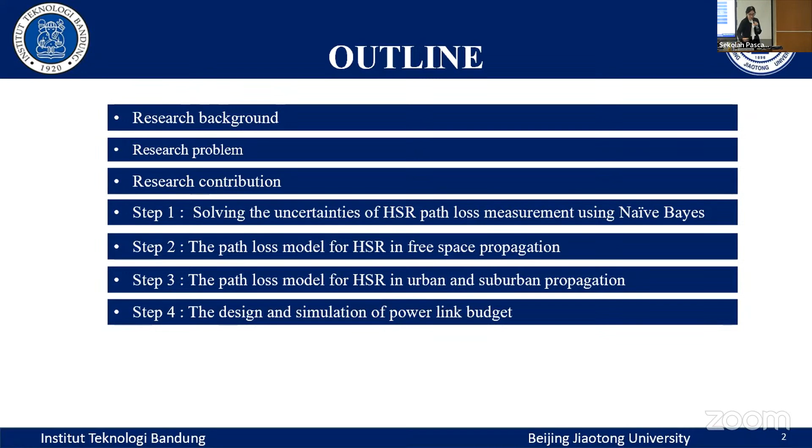And then I'm going to solve the uncertainties of high-speed rail path loss measurement using naive Bayes. And then we proceed to proposing a path loss model to be utilized in free space propagation, followed by another path loss model to be utilized in urban and suburban propagation. And then I'm going to show you the design and simulation of power link budget in which the proposed path loss models are calculated into it. And then after this, we have conclusions and remarks drawn at the end of this presentation.

Let's see here. This is how Indonesia must face the severe public transportation problem. It may include the problem of saturation, which happens when the number of cars is more than the roadway can support. And then we have the problem of construction, which may include installing traffic lights, creating one-way streets, and adding more lanes to the highway. And also we must face the problem of accidents, because car accidents block traffic flow for many reasons. This problem is also growing leaps and bounds in developing countries like Indonesia.

Therefore, high-speed rail provides many benefits as it boosts the economy in many ways. It is safer than driving. It can reduce our dependence on foreign oil and congestion also. It is more time efficient and produces less smoke in the city as well.

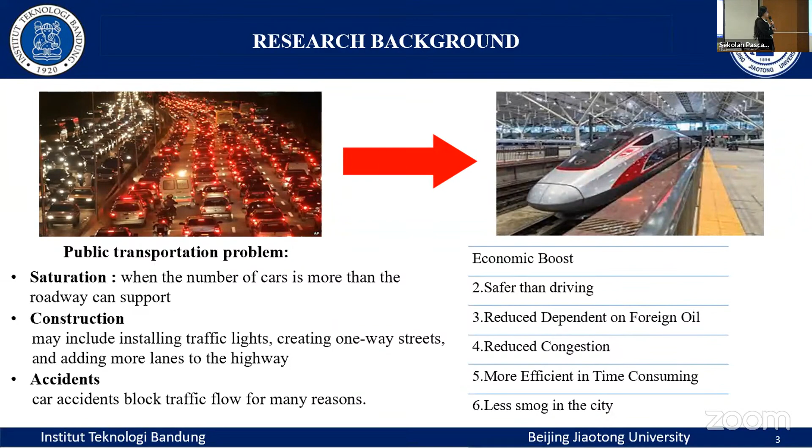From here, I'm going to show you that Indonesia adapts the Future Rail Mobile Communication System, which is a platform for unified voice and data communication for modern railway applications. It is a platform for the previous GSM-R. It is easily integrated into the higher allocated spectrum.

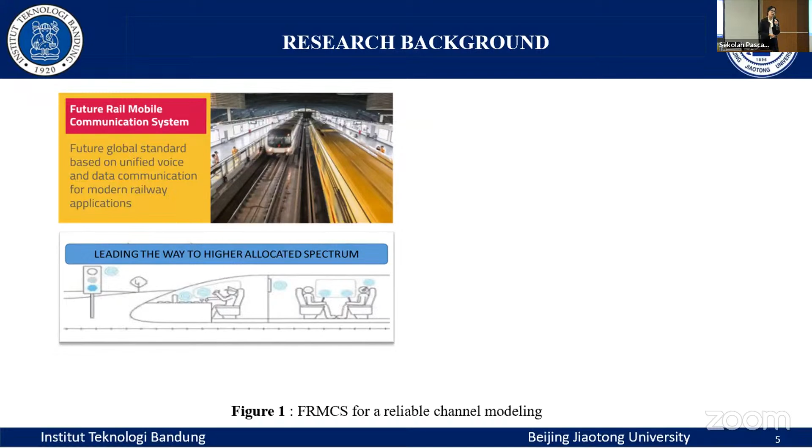And to ensure the reliability of the FRMCS system, we require what we call channel modeling. Channel modeling defines a mathematical equation of how the signal behaves, and it is classified into the outdoor channel model and the indoor channel model.

In the outdoor channel model, the propagating signal must face multipath components. And for high-speed rail, it must face the line-of-sight scenario and non-line-of-sight scenario. Meanwhile, in the indoor channel model, the signal propagates from the mobile relay station to the mobile station, which is located inside the high-speed rail itself.

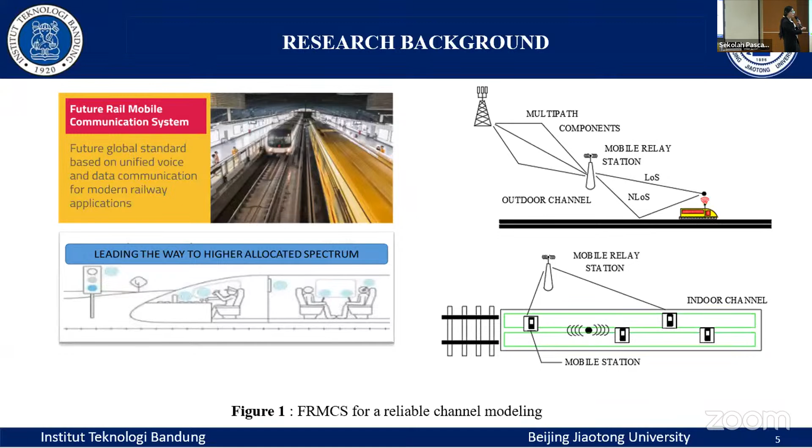So the key objective of adapting this FRMCS system is to mitigate the obsolescence of narrowband bearer technologies in order to keep up with modern telecom infrastructures. This requires more bandwidth to support advanced features such as standardization like 3GPP and onward, to fully support train control, security, and safety.

So from here, I can summarize my research problem like this. Indonesia adapts the future railway communication system, in which we require reliable channel modeling. Therefore, the study of path loss becomes very prominent. And there are two supporting technologies for reliable transmission, the MIMO antenna systems and small cells, in order to achieve the optimal power link budget to be utilized by network designers.

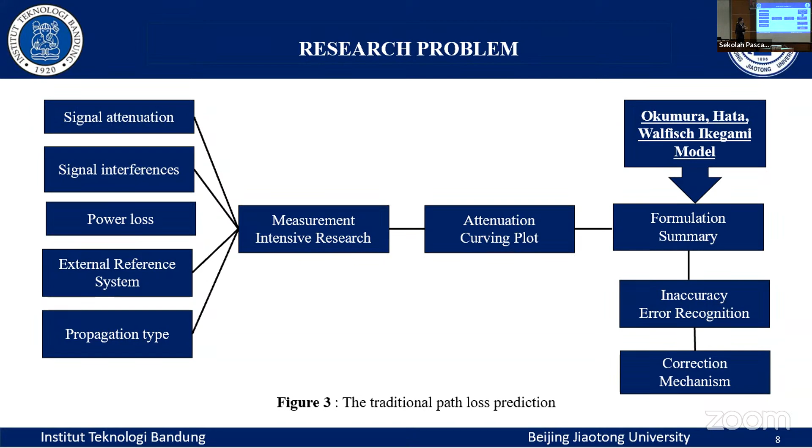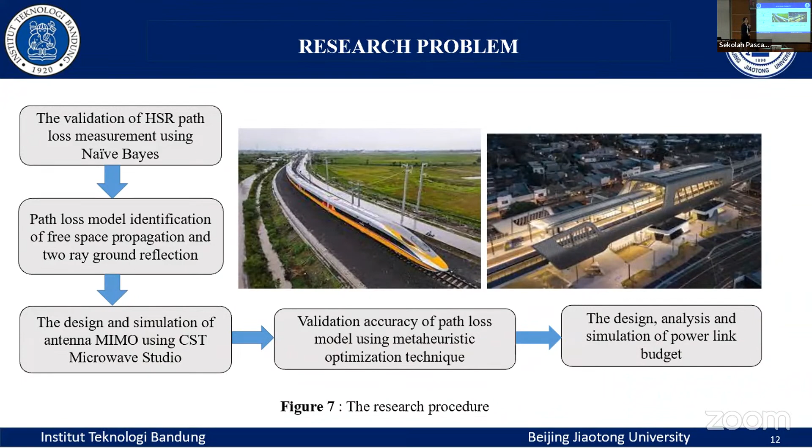Okay, now I'm going to start this off with step number 1. In this part, there are 3 factors that must be under investigation. Firstly, we have the factors of path loss, the measurement, and artificial intelligence. And naive Bayes is put in the middle because this is the machine learning method that I'm using. And this is the common formulation of naive Bayes.

The achievement would be the prediction of a binary result, in this term, accurate measurement or inaccurate measurement. And this is where all the data preprocessing is located, under the assumption of independence from each other. So from the raw data set that was given by Beijing Jiaotong University, I apply the data preprocessing to be put in probability B, and I apply the Gaussian naive Bayes classifier. I can then have a performance indicator in the form of a confusion matrix and the prediction of the binary result.

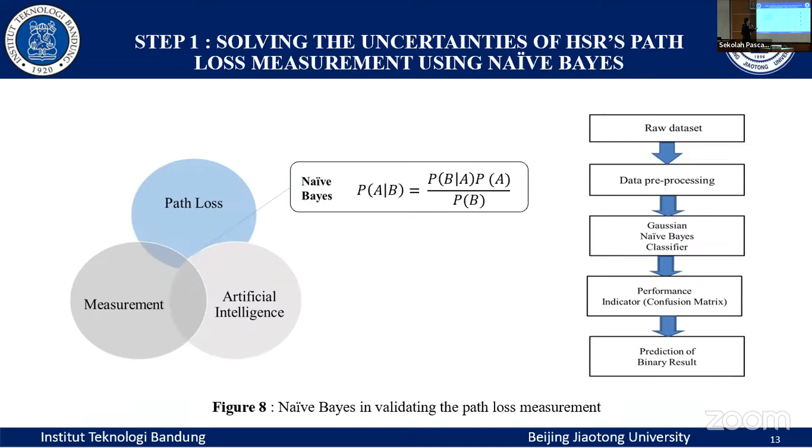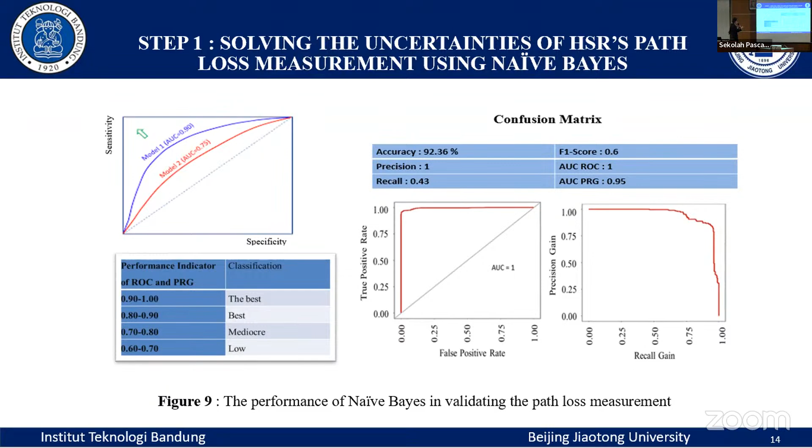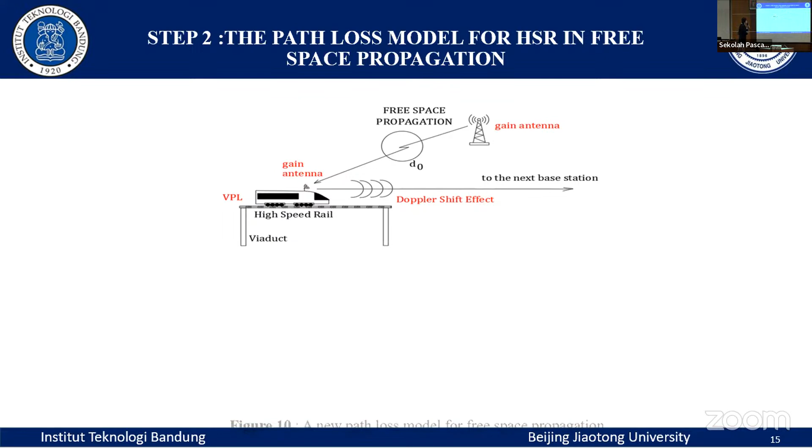From here, I'm going to propose my path loss model to be utilized in high-speed trains under free space propagation in the viaduct scenario. This scenario is chosen because this is where the signal is free from attenuation and obstruction. And in my path loss models, you can see this is the model that I propose. This is where the validated measurement data set is located, which is equal to 92.45 plus 20 log frequency carrier plus path loss D0 plus 10 gamma log d divided by D0 plus X sigma plus Doppler frequency plus vehicle penetration loss minus 14.89.

As you can see, there are 3 unknown parameters here. I notified them in red, and I'm going to change the terminologies into X1, X2, and X3 when the iteration begins. These are the unknown parameters that we must find using a meta-heuristic optimization technique. But let's firstly define one by one the meaning of each parameter.

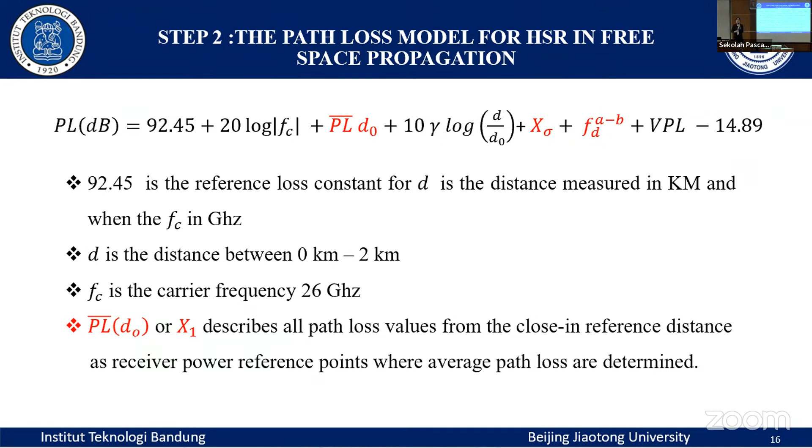Firstly, we have 92.45. This is the reference loss constant when distance is measured in kilometers and the frequency carrier in gigahertz. The distance is the observation range, 0 kilometers to 2 kilometers. The frequency carrier would be high, at 26 gigahertz. The path loss D0 describes all path loss values from the close-in reference distance as receiver power reference points where average path loss is determined. You can say this in a simple term: this is where the signals begin to attenuate.

And then after this, we have gamma, which is the path loss exponent, put initially to 2, and X sigma, which is the loss due to fading and shadowing. And then we have the Doppler frequency, which is a non-linear equation, and the values are dependent on the corresponding distance. And then we have 20 to 25, which is the maximum vehicle penetration loss, and 14.89, which is the gain of the 2x2 MIMO antenna from the simulation using CST Microwave Studio.

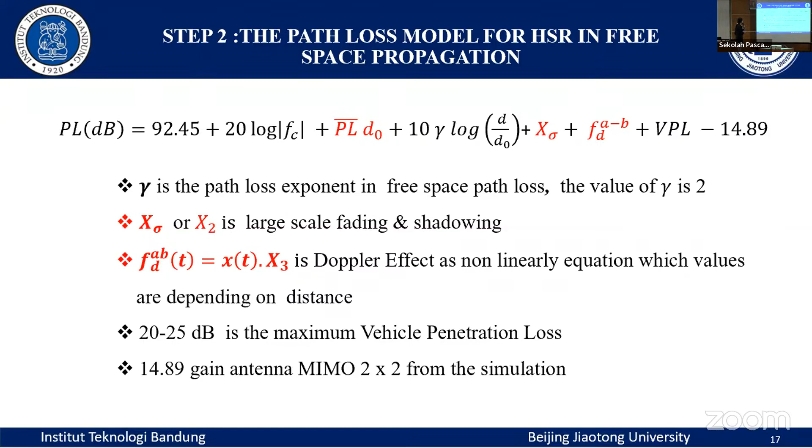Now, firstly, let's talk about the path loss exponent. This is a parameter indicating the rate at which the receive signal level decreases with distance. And this is the typical path loss exponent for many kinds of environment. Let's say free space initially is 2, and we have a value for urban and suburban, indoor line of sight, and obstruction in building, and factory is 2. But for high-speed rail, we will find out later how it can be achieved.

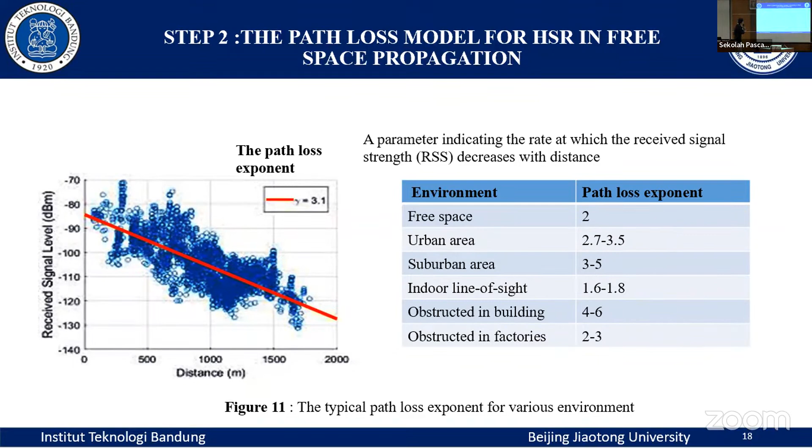Now, let's start to validate the model, but firstly, I'm going to show you the MIMO antenna system that I conduct in this research. Firstly, this is the manual calculation of a defected ground structure antenna, one element. And if I configure the antenna like this, I'm using RT Duroid 5880 because it is easy to be fabricated.

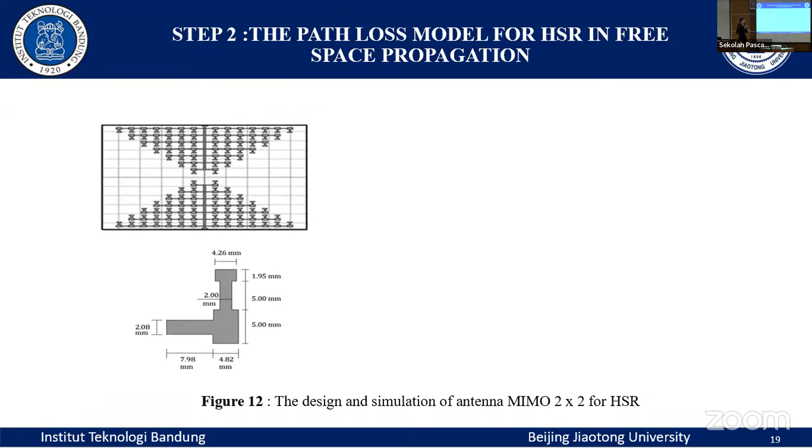And when I feed it with a microstrip feeding line, we can see the movement of the electromagnetic beam, and I have the gain of 14.89 decibel. This value is very meaningful because this gain is sufficient enough to mitigate all the losses from my path loss values, and also it can bridge the low and high frequency spectrum of high-speed rail.

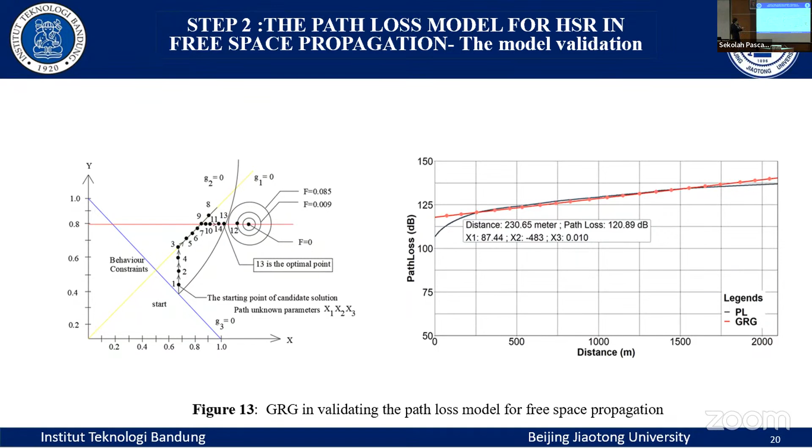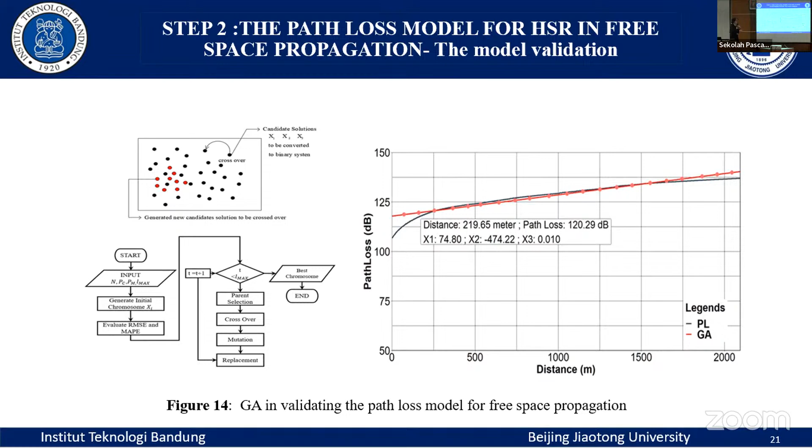From GA, I'm using another metaheuristic, what we call particle swarm optimization. So here we have two kinds of terminologies: the best position and the best velocity. And of course, there are some control parameters like inertia weight, coefficient relation, how many iterations you want to conduct. And you see that PSO has successfully validated the model when the distance is 194, when the path loss is 119, and these are the candidate solutions achieved by PSO.

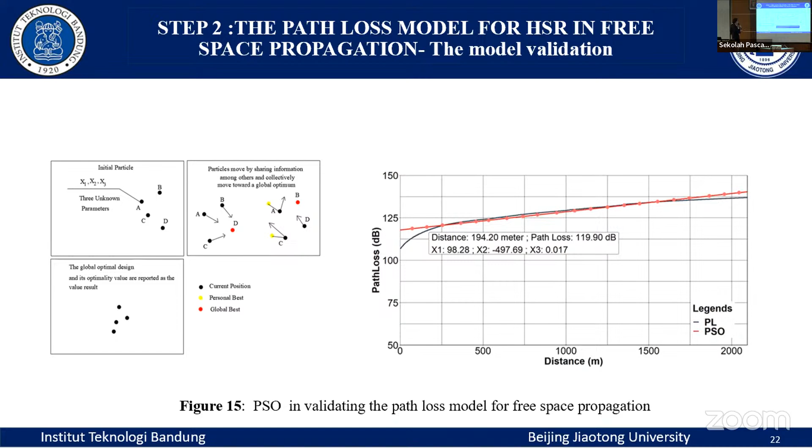From PSO, I am using CAPSO. CAPSO is an improved PSO because it uses only the global best without the individual best solution to reduce randomness. Not to forget to mention that in CAPSO, I'm injecting Newton's law of motion to iterate the process really fast. You can see the performance of CAPSO; it converges when the distance is 224, when the path loss is 120, and these are the candidate solutions achieved by CAPSO.

From CAPSO, I'm using FPA. This is a more up-to-date algorithm. We can see in the flower pollination algorithm, we have two kinds of pollination: abiotic if the pollinator is the wind, biotic if the pollinators are insects. And then we have types of pollination. We have self-pollination with the same flower, self-pollination with a different flower of the same plant, and cross-pollination with a different plant.

And based on these pictures, there are 5 rules of FPA that must be considered. Firstly, biotic pollination and cross-pollination is global pollination, carried by the pollinators. We can call the pollinators' movement a Lévy flight. And abiotic pollination and self-pollination are considered as local pollination. And insects as pollinators are equivalent to flower constancy, with reproduction probability proportional to the similarity of the two flowers. And then local pollination and global pollination are controlled by this switch probability.

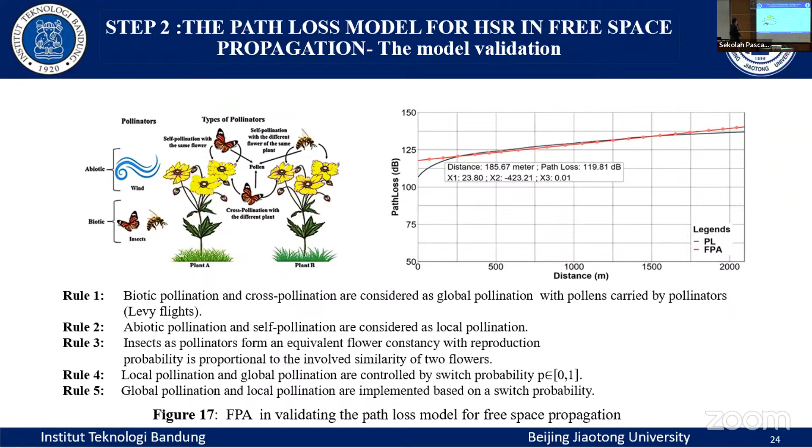This is mimicking the hunting behavior of the humpback whales. There are three terminologies we have to consider. Firstly, what we call the logarithmic spiral; searching for the prey; and the bubble-net attacking, what we call the exploitation phase, while searching for prey is the exploration phase. And this whale optimization can already validate the path loss model when the distance is 229, when the path loss is 120. And these are the candidate solutions achieved by WOA.

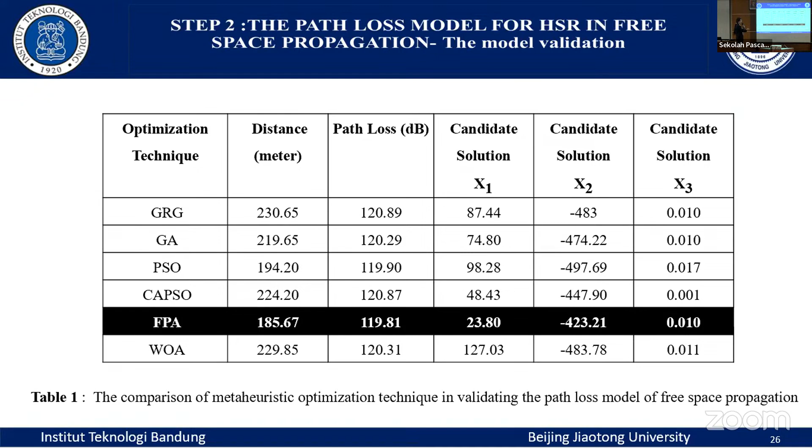From here, I'm going to show the comparison of those meta-heuristic optimizations for free space propagation. From the 6 optimization techniques, it is FPA that is chosen as acceptable to be put back in the equation, because it converges faster than the other optimization techniques. And therefore, let's see the iteration of the path loss exponent.

In high-speed rail, in my research, the path loss exponent is achieved by averaging each batch of iterations. One batch is like 500 times. And we can see I can put gamma as 2 as the average path loss exponent in the equation. And this is the candidate solution achieved by FPA that is acceptable to be put back in the equation. And this one, we have to calculate with the corresponding distance. So now we have completed the unknown parameters by using FPA.

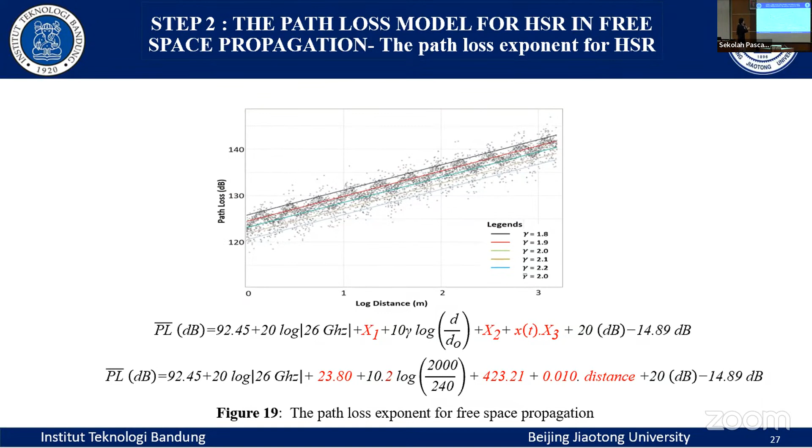And then in step number 3, I'm going to show you another proposed model. This model is a more reliable and realistic model. It can predict large signal strength over several kilometers with a minimum transmitter height like 50 meters. This one has to be 50 meters. And practically, the separation between base station and the mobile should be 10 times the transmitter height plus receiver height, but ideally, just more than transmitter height plus receiver height is enough.

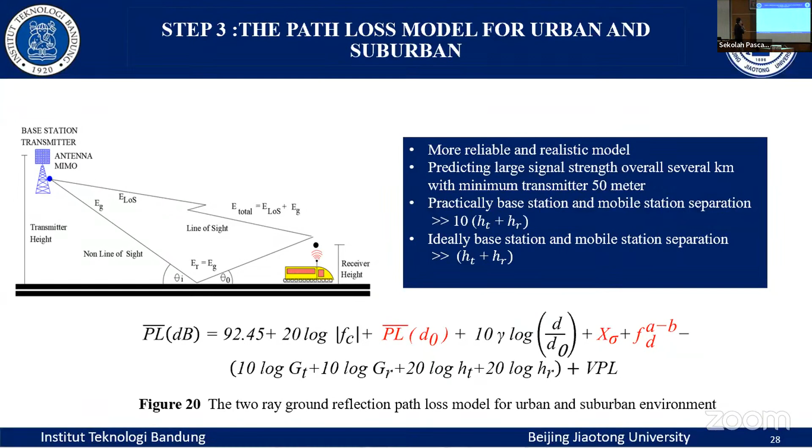And in this model, we assume 2 incoming signals, what we call the line of sight scenario, and the Earth-reflected one, assuming the Earth is flat with no steep inclines. And these are the models for urban and suburban environments. And there are some additional parameters too. Here you can see that there are again 3 unknown parameters that must be resolved by using meta-heuristic optimization. And I'm using what we call GBNN and FPA in validating the path loss model of two-ray ground reflection.

FPA has previously successfully validated the model. That's why I'm choosing to use FPA again. And it successfully validated the model at 263 when the path loss is 120. And these are the candidate solutions achieved by WOA for urban and suburban scenarios. And I'm using GBNN too, which is abbreviated from gray box neural network. At the distance 297 and the path loss 120, we have achieved the candidate solution.

What makes GBNN unique is that it is a greedy algorithm. Usually we require loads of data sets, but even with a little data set, it can perform very well. You can imagine if we have more data, you can increase your accuracy as well.

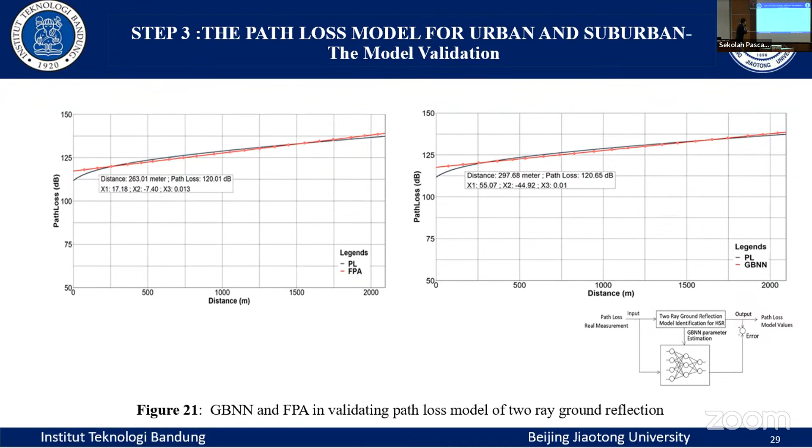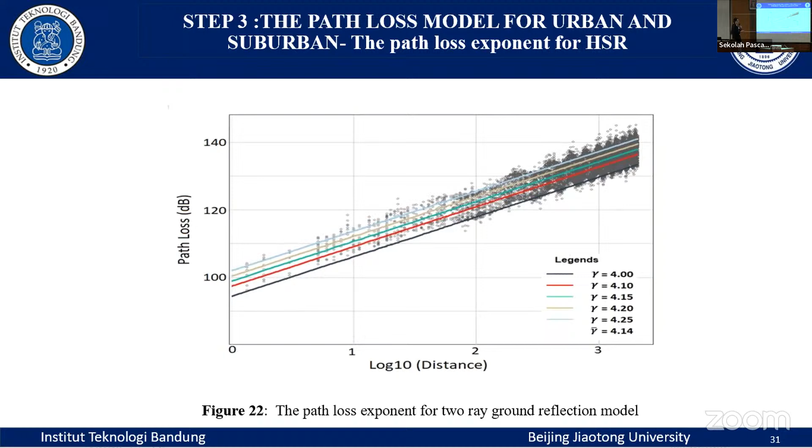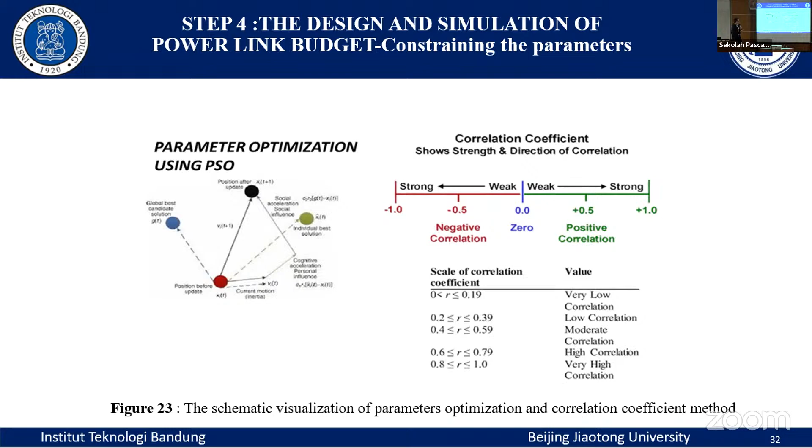From here, I'm going to show you the design and simulated link budget. But before that, I'm doing another optimization, this one using PSO, because I have to make sure that my path loss models are in the observation range. And another one, I have to use a correlation coefficient to show the associated strength of each variable. And this is the path loss model to be utilized for free space propagation in the high frequency spectrum. Let's check it out together.

We have the parameters for the transmitter. What makes the difference is the antenna height should be 30 because this is a viaduct scenario. The 14.89 comes from the simulation. And this is the environment characteristic that has been included in the model. The gamma is 2, and the constant will be 92.5. This is where the PL is located. This is the receiver parameter.

You can see the gain will be 6.11, and the cable loss and antenna height come from the textbook, because the antenna should be counted from here to the antenna installed on the high-speed rail. And this is where the optimization result is located. We have the path loss at D0, we have X sigma, large-scale shadowing and fading, and Doppler frequency that must be calculated with distance.

And if I click calculate, I have the optimized path loss 143, which is in the observation range, and the received signal level will be minus 90, which falls between good and average, which is mediocre only. But let's compare it with the two-ray ground reflection.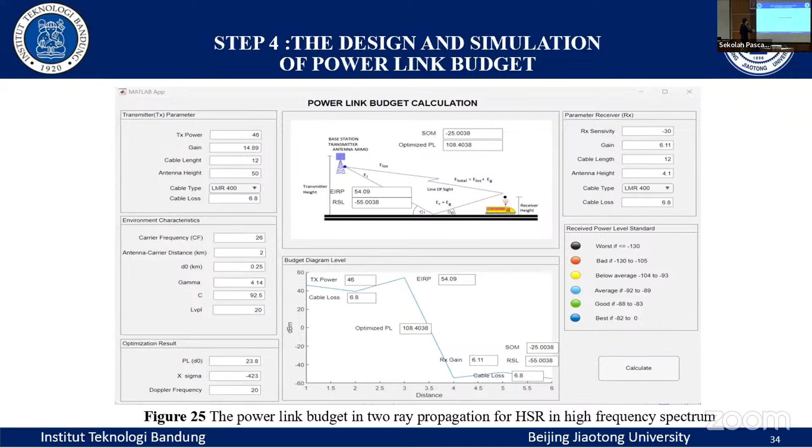Next, I'm going to show you the list of parameters, average and best, as I have shown you before in the previous link budget. The optimized values and the received signal level that I have achieved is average, and for two-ray ground reflection, the optimized will be 108, and the received signal level will be indicated as the best.

Now for the low frequency spectrum, what makes a difference is I'm going to use the constant 32.5, and the carrier frequency will be 900 megahertz. Also, we must use the least path loss models, which are point-to-point models. The optimized path loss values and the received signal level for free space propagation is good. But in two-ray ground reflection, we have to use gamma 4.14. So there we have an optimized path loss of 140, and the received signal level will be minus 87.

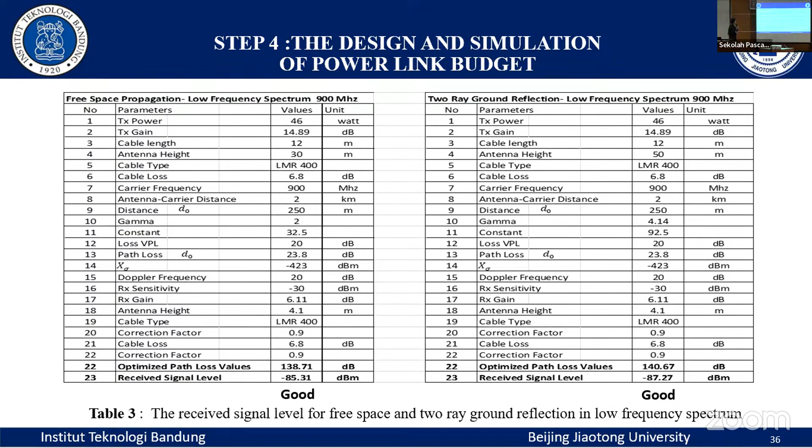Then the optimal link budget is further designed and simulated, in which the path loss values will be calculated and the received signal level in the high-speed rail will be finally acquired. The optimal link budget can now readily be used by network designers of high-speed rail to plan the cell coverage, new frequency setup, and base station infrastructure planning.

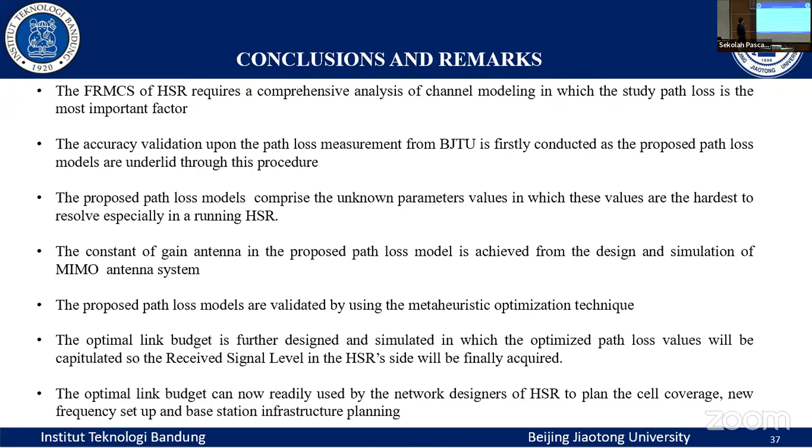Okay, thank you, Selvi, Lukman. Yeah, high speed presentation. Okay, so you have some time maybe to have a seat and also to have drinks before we continue for the discussion. Okay, thank you. I'm ready.

Ladies and gentlemen, now we are going to continue with question and answer. First, I would like to ask the external examiner, Professor Insinyur Gamantyo Hendrantoro, Master of Engineering, PhD from ITS, to deliver some questions or comments. Please, the time is yours. Thank you, Mr. Chairman. Good morning, Selvi. First of all, I would like to congratulate you for reaching this final stage of your doctoral program. I hope everything is going fine today. Thank you. Okay, so I have basically two big questions.

The first one is about the HSR communication systems, because it's not really explained in detail in your dissertation. In a communication system, there are at least two parties communicating with each other, at least one transmitter and at least one receiver. So in HSR communications, who are these two parties? One is the base station, I understand. So what is the other one? The other one would be the high-speed rail itself.

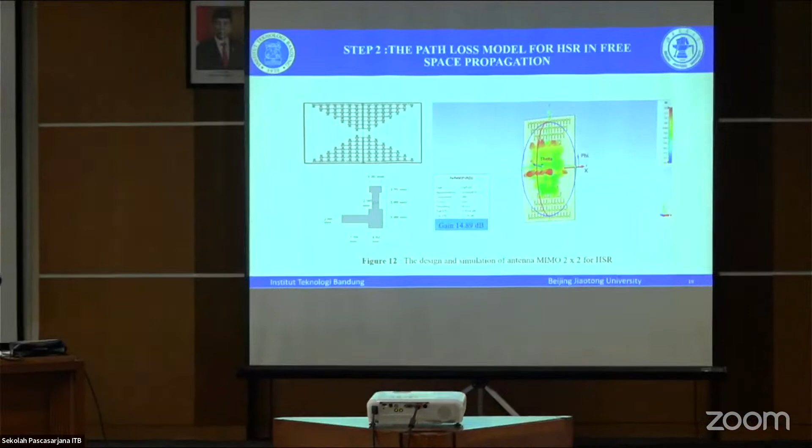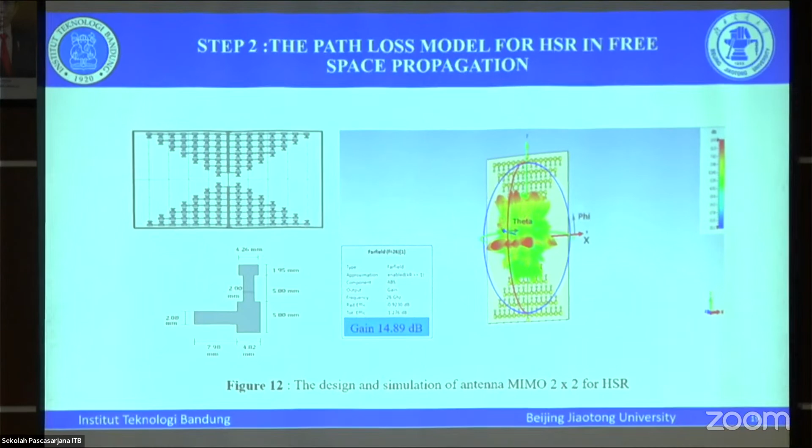Okay, so how many antennas are there actually? 112 radiating elements. So how are you going to fit that antenna? Do you need only one feed or 112 feeds? It has to be, I don't have it pictured here, but...

I'm sorry, I don't recognize the question. So there are 112 elements. Are those elements operating in phased array mode? Active array. Yeah, so it's an array, right? Yes.

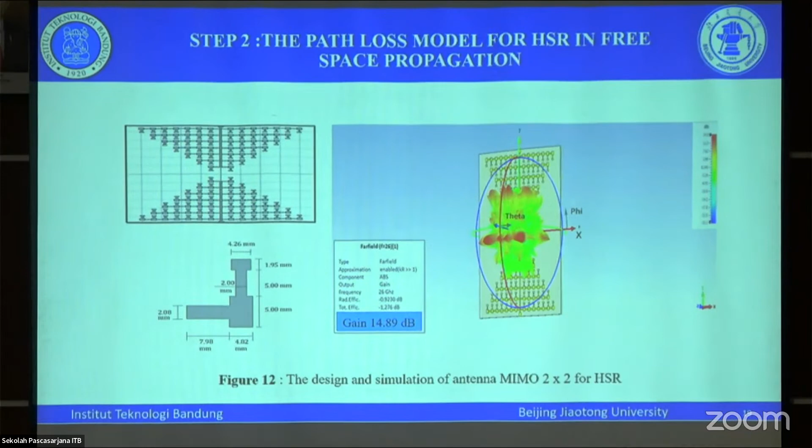So in fact, it is not a MIMO system, right? It's an active array, this is MIMO, but it is an active antenna array. So it's actually related to my question before.

How many feeders do you actually need to operate that antenna? Only one, so that one input will be split into, let's say, 112 elements, or do you actually need 112 feeders? I think this is just a simulation because I don't install it independently from the base station. I think it is only one.

It is only simulated. Okay, so if it's only using one feeder, that means it's actually a single antenna. For operation in a MIMO scheme, you will need more than one antenna, several antennas like that. Okay, so it's only one.

So what is the dimension of that? This is the manual calculation, the width and the length. The one element? No, actually the whole thing. What is the dimension? Because I think it's not there.

It is not there because it is not written in the simulation, but the simulation doesn't account for the measurement of the dimension. It only shows you the direction of the electronic beam.

Okay, but I assume it's not very large, because you're using 26 gigahertz, which means the wavelength is probably in the order of 1 centimeter. At least it says 7.9 plus 4, which means about 1.5, or let's say 2 centimeters, and it's like 13 centimeters. Then you have, like, the width probably 20 or 30 centimeters.

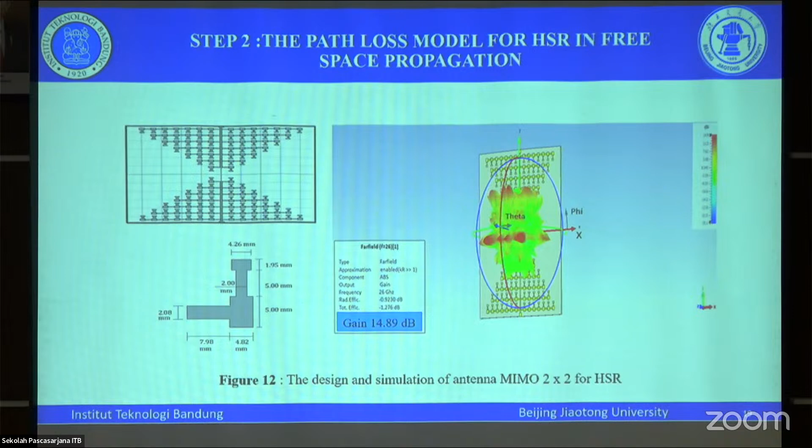That means, my question is more about its application for MIMO. Because I think you mentioned in your dissertation that HSR communications require massive MIMO. Right? It should be more than this. This element must have massive MIMO in the base station.

Do you know why HSR communications require massive MIMO? Yes, to ensure the transmission link, because it has the ability of beamforming and multiplexing, as it can carry data simultaneously over frequency similar paths. Okay, your answer is correct. So massive MIMO is used because of its beamforming capability, but also for multiplexing, spatial multiplexing.

So that's only one phased array that you show there with 112 elements. Now, how much gain improvement, antenna gain improvement, did you obtain by using 112 elements?

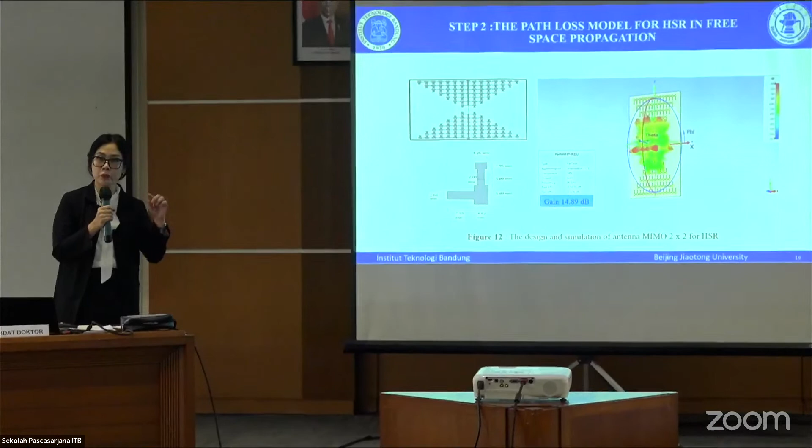I have achieved a gain of 14.89, and one of the literatures that I have read said that to mitigate and bridge low and high frequency systems, I have to achieve more than 10 decibels. So I think a gain of 14.89 is sufficient to mitigate all the losses and for bridging the low and high frequency spectrum.

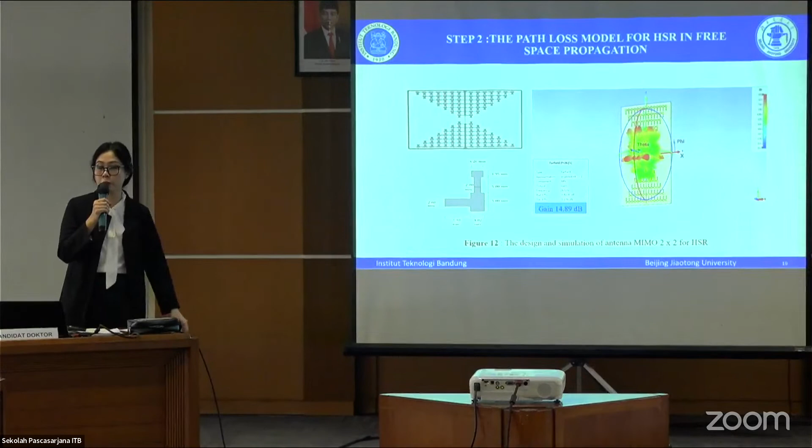But actually, if you have 112 elements and all of those are looking at the same direction, let's say scanning or facing the broadside direction, then you will have a full constructive addition of electromagnetic waves, meaning at least 112 in total constructive addition. So if we convert that into decibels, then I think you should have more than 14.89, right?

This is actually from the simulation. But that is very meaningful. That makes my path loss values really good then.

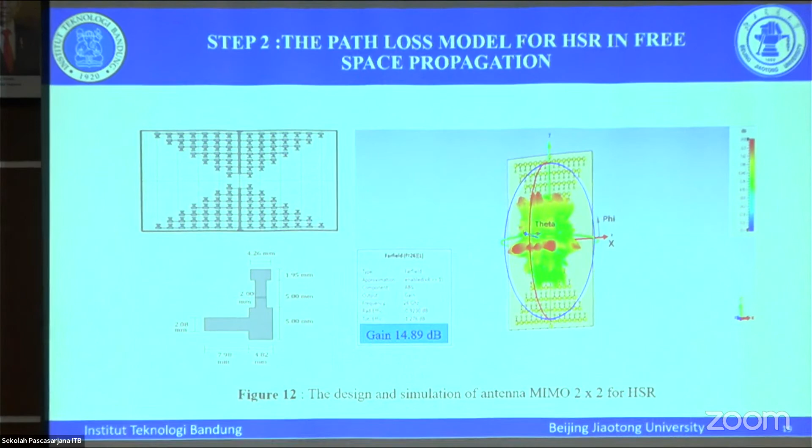Okay, so now if we see the radiation pattern, we can see there are at least, let's say, four big beams facing the broadside but with small deviations. So there are four red beams over there, facing the front direction.

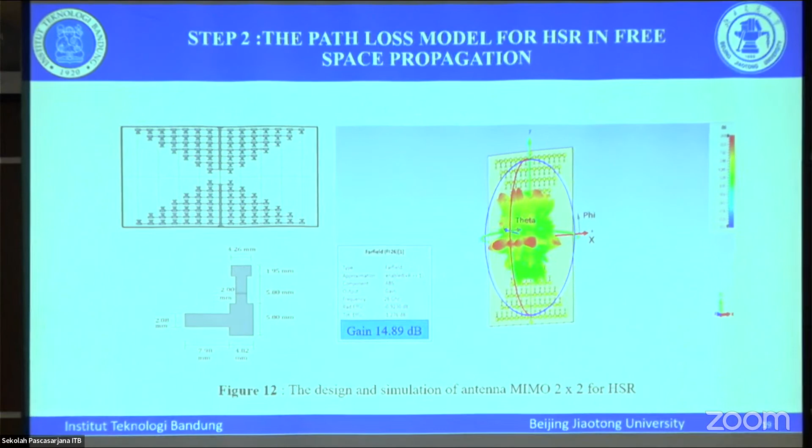Is that a radiation pattern that you really need for HSR? No, I don't need a specific radiation beam, because what I need is to achieve a sufficient gain.

Because firstly I considered using a circular patch, but as I've read, if you want to have matched impedance and optimal bandwidth, you use a circular patch. But since I need a very good return loss, VSWR, and gain antenna, I'm using the rectangular patch. So I'm not working with the electromagnetic beam.

Okay, so my concern is that because you are assuming a free space channel model, and free space channel model is characterized by a single path coming from the transmitter antenna to the receiver antenna, a single straight path, that means you only need one beam with high directivity.

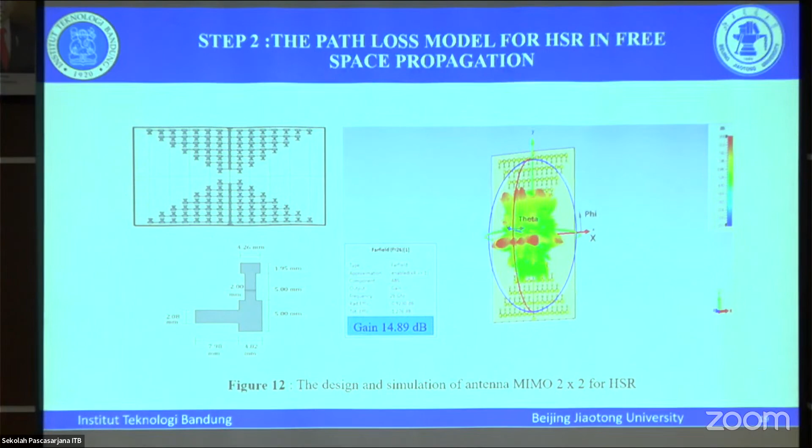But now we have four beams, and with four beams there could be multiple paths. And if we have multiple paths, it's not a free space channel model anymore. That's just my concern actually.

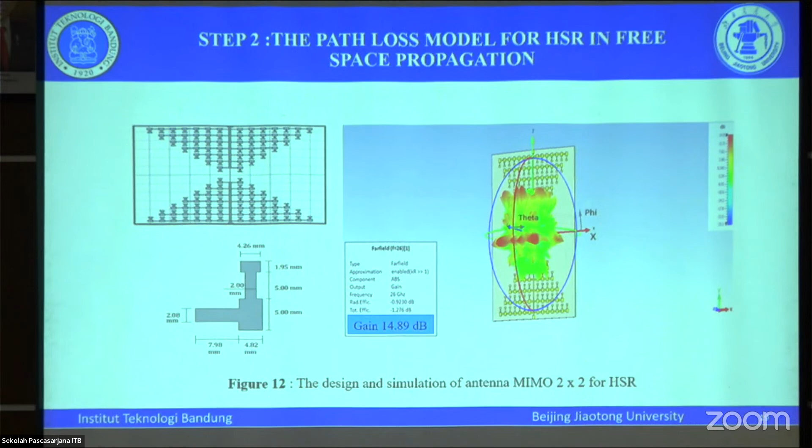So I thought there is probably a reason why you designed the antenna with a radiation pattern like that. No? No, that's the reason, I'm going to need a sufficient gain, that's all.

Last question from me. So you have a very nice, interesting shape for the design, like two pyramids, or like a biconic or something like that. But how did you come up with the shape of that design?

From the books that I have read, because some of them use just a simple rectangular. I have two books that underlie my model like this, and I'm following how to design, calculate, and try to configure it.

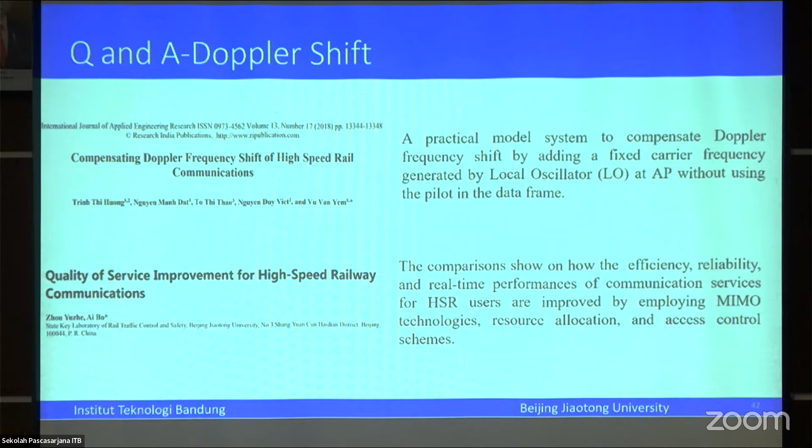Yes, of course. But the path you took is unusual because with your path loss model, do we still need to perform this Doppler shift compensation like these papers? If these papers use your path loss model, do they still need this Doppler compensation? Because, like you said, they use techniques like MIMO, resource allocation and so on. So do we still need these techniques?

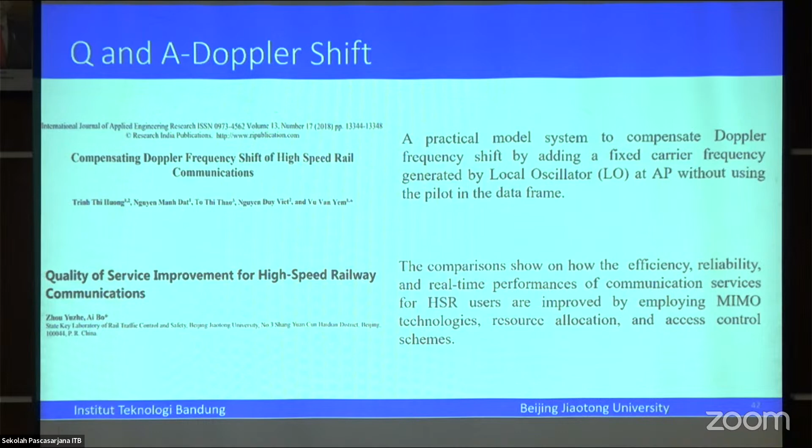Okay, so if I use the technique proposed by Professor Ai Bo in this paper, but implement your path loss model, I still need to perform Doppler shift compensation? Yes. And why is that, since you already use Doppler shift in your path loss model?

Why do we still need it? Because we will never know the exact tuned velocity you're going through, and also the multi-path propagation you're traveling through. You will never know, because inside the train, the velocity really fluctuates - when you come to the rural scenario you can speed up, and when you come to the urban area you have to slow down a bit. That's why the Doppler shift will be very fluctuated.

Okay, I think it would be more interesting if you proposed adding Doppler shift in your path loss model so that we don't need to perform any compensation, because that would extremely reduce the complexity of the transmitter or receiver - we wouldn't need any compensation since you already put it in the path loss model. That's what we would expect.

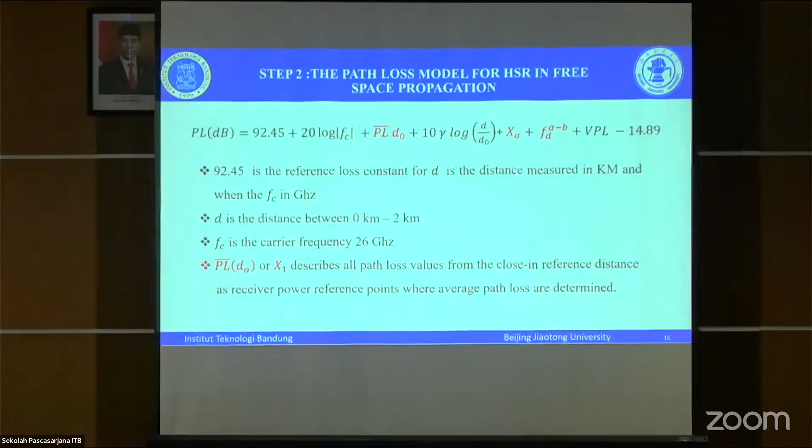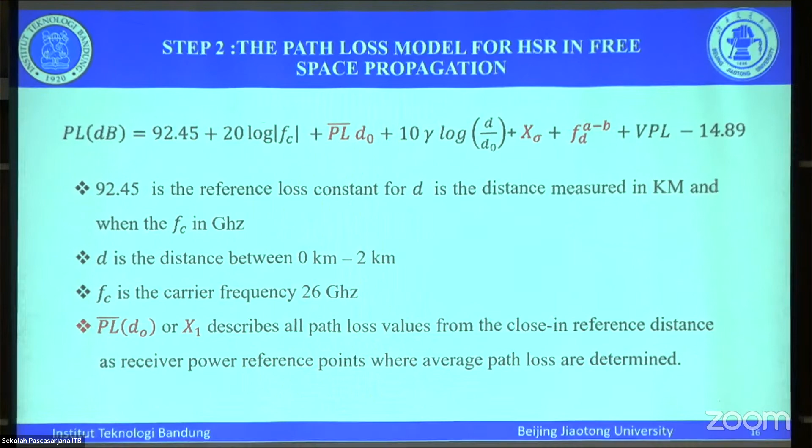Okay, here we are. Okay, that's X1, X2, and X3, right? Yeah. Okay. So, this is assuming that the train is only connected to a single base station. But in the future, we will have the train connected to multiple base stations. Which parameter, X1, X2, X3, do you need to modify for more base stations?

The X sigma, the shadowing, and the path loss D0 should be considered, because this is where the signal is attenuated from the base station to the high-speed rail, and you have to consider changing the path loss D0 values, so that there will be multiple for the multiple base stations. So you will have some more beams, and you can make statistical properties upon this measurement. So the path loss D0 can be varied.

Okay, and why X sigma you need to modify? X sigma, because maybe for utilization of higher frequency spectrum, you're gonna have more large scale fading and more shadowing. And even though it is going to be compensated with the antenna gain, you have to consider maybe there are weather changes or the contour changes. This is all included in X sigma.

I mean, how will using multiple base stations affect this X sigma? Do you need to have multiple X sigma or just a single one? Just one single X sigma, but you must consider varying the path loss D0. Yes, okay. So you said one single X sigma, and do you think the optimal value will be lower or higher than the one obtained already in this work?

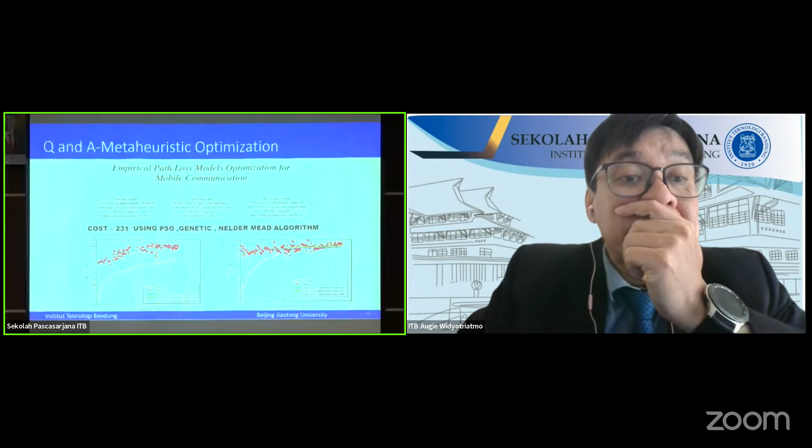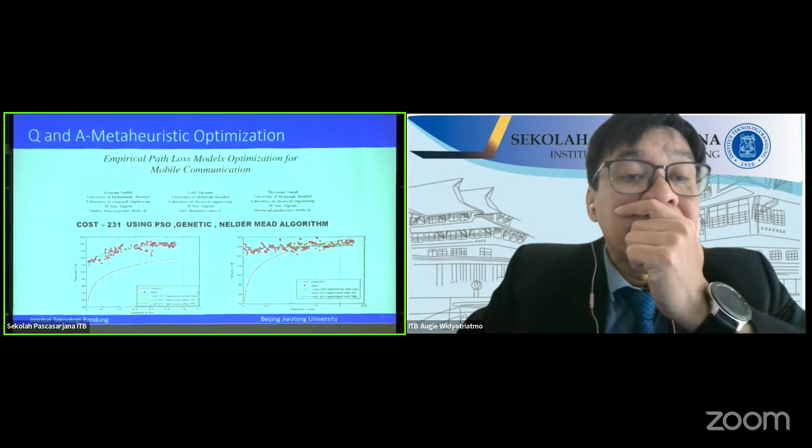So right now there is no comparison between your proposal and the methods already used by other researchers or other standards? Yes, I'm going to show you. The literature is quite limited, but I have found a paper entitled Empirical Path Loss Models Optimization for Mobile Communication. The author is Messaoud Garah. He's tuning COST 231 using PSO and genetic algorithms. This measurement is conducted in Batna, Algeria. In this, he optimized COST using PSO, GA, and another algorithm and compared it with the original set.

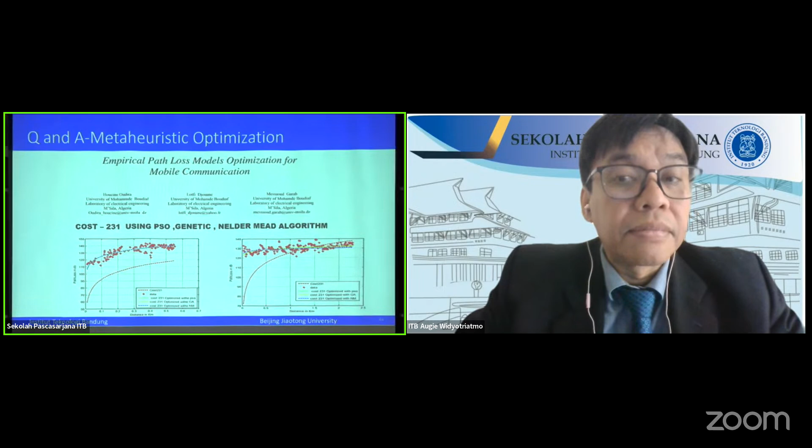I'm sorry, I cannot hear. Hello? Oh yeah. Hello? I can hear right now. So

Yeah, from that paper, you are saying that the standard has been compared, and some of the methods they propose are close to what you have done in your dissertation. Is that correct? Yes, but the lack of this paper is they don't create their own model, because COST 231 already existed. What they do is only tune it with PSO, genetic, and another algorithm to show which has better performance between the three algorithms to validate COST 231.

So COST 231 is the standard. It's a path loss model for cellular, usually used by engineers to design the power link budget, something like that. Yes, it is like what Okumura-Hata is doing. They are proposing a model which is utilized in a specific environment, and COST 231 is almost the same. And there is a measurement showing COST 231 is applicable in Algeria, in Batna. So this is where the measurements are taken from.

Okay, let's see one model. Let's see from the GRG first. Okay, yeah, firstly, there is a difficulty to converge from 0 meter to like 250. And then after 250 meters, the model starts to adjust to the input path loss data measurement, as I can see in this figure 13 right here.

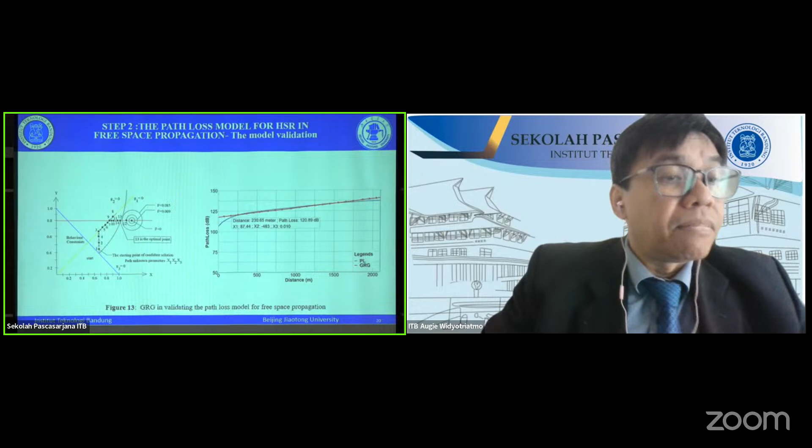So is it because the model that you choose is a linear model, a function of the distance? There is one non-linear equation, which is a Doppler, and I put it at very small values. That's why there is actually a non-linear component, but because the value is really small, the curve will look linear. Okay. So there is a logarithmic as well, yeah? Logarithmic function.

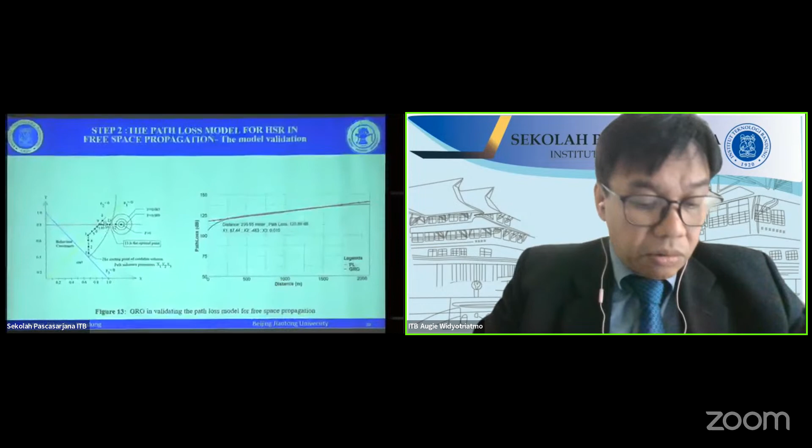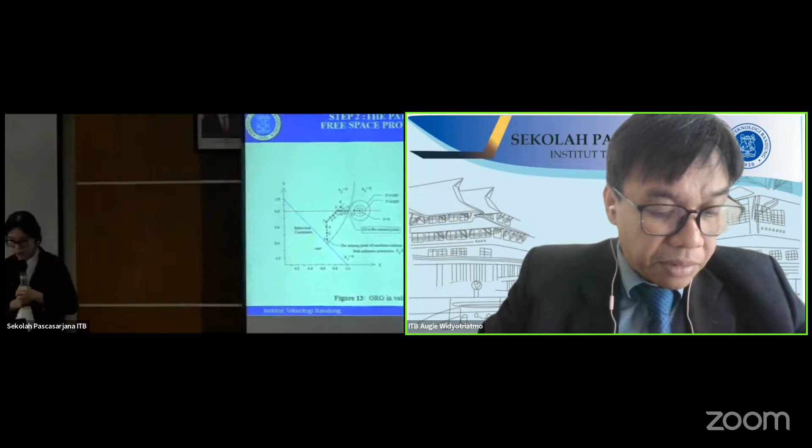So from 0 to 250, do you make some analysis? What is the difference, RMSE or other parameters for calculating the errors in that region? The thing is, I'm not calculating the errors between 0 kilometer and 2 kilometers. What I'm observing is when the model starts to adjust. So I'm not observing the RMSE parameter during 0 kilometer to 250.

So what is the distance between one antenna and the other? Assuming this only comes from one base station and perhaps one antenna to the base station, I don't think there are multiple antennas during the journey of this high-speed rail. Yeah, I mean, what is the usual distance between antennas? Because this data is given from China, we can see it is usually like 20 kilometers from the nearest base station. But let's find out in the paper right here.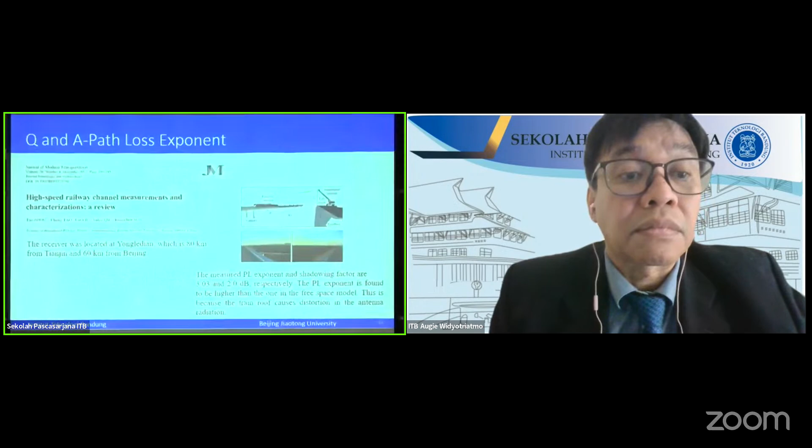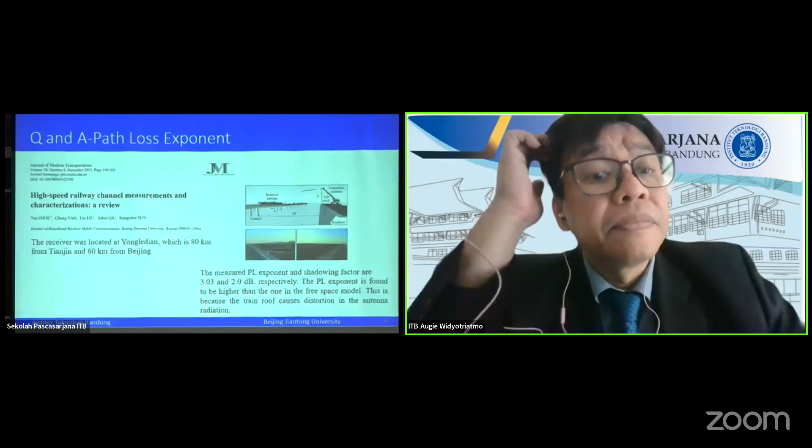There is a measurement campaign. Here. In this picture, we can see how the antenna is located. It's like 83 meters from the viaduct to the roadbed. And the receiver to calculate the path loss exponent is located 80 kilometers from Tianjin and 60 kilometers from Beijing. I'm going to assume the same too, because the high speed rail has not been running yet. Typically it's like 20 meters from the viaduct to the base station. So it means that the distance between antennas is about 60 to 80 kilometers.

Yeah. So it means that the deviations from 0 to 250 meters will not be very much in our consideration, right? Yes. So because your data is only 2 kilometers and it seems that it starts to deviate after 2 kilometers, and it is going larger, how can we assure that we have the right model for 80 kilometers?

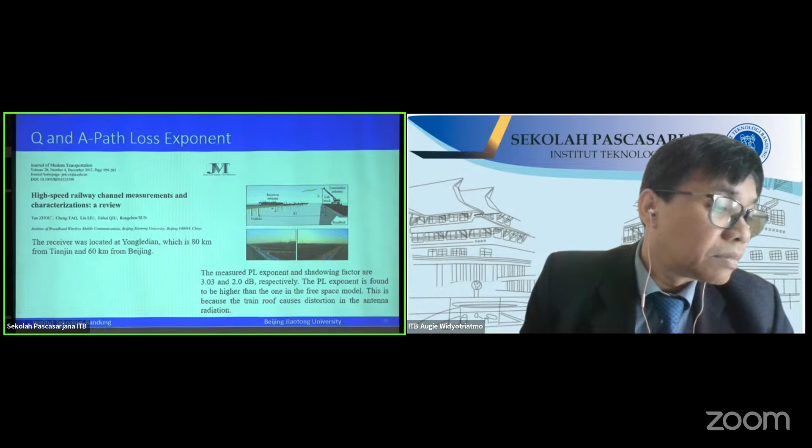Okay, this is an assumption I make too. Within the 2 kilometers, I assume the path loss D0 would be 250 meters from the base station. This is where the signals begin to attenuate from the base station. I put this in my model, because when this model was designed, the high speed rail was not ready. And what I have from Beijing Jiaotong University is the received signal level. That's why I have to extract the received signal level and design my own model for high speed rail. So the D0 in D by D0 comes from my assumption.

Okay, but how will your method be used for expanding from 2 kilometers up to 60 or 80 kilometers? In the link budget that I'm using, you can just click the buttons and put the kilometers that you want to travel. And then we can observe the received signal through the link budget that I have presented in my slide. So perhaps more data sets can achieve a closer adjustment too.

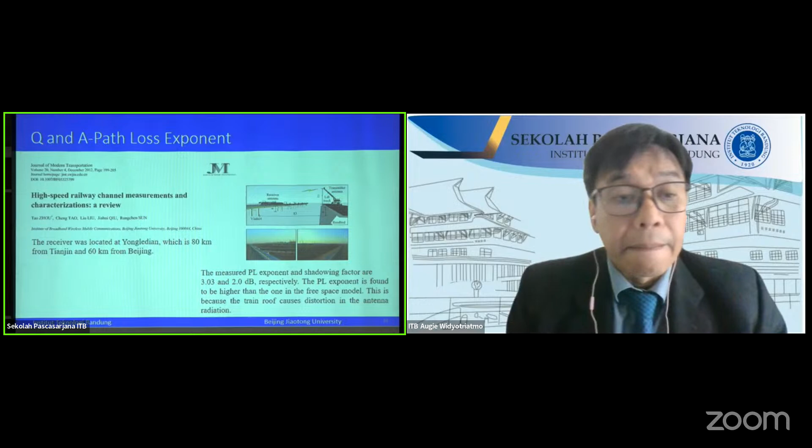So what is the path loss in decibels that is allowed for the signal to travel? Typically for free space the exponent is 2, but you can see in this paper, in the same viaduct scenario, under measurement we can achieve a path loss exponent of 3 because the train roof causes distortion in the antenna radiation. But in the meta-heuristic technique, since it is theoretical, I put initially 2, and when it is iterated, the path loss exponent is averaged, and I achieve the same value, which is 2 also.

Okay, so I would like to ask the last questions.

New buildings and trees in Indonesia may grow in the middle of the signaling path. So what will be the impact if this happens, and what suggestion should the operators follow to keep the designs as close as possible to the free space assumption?

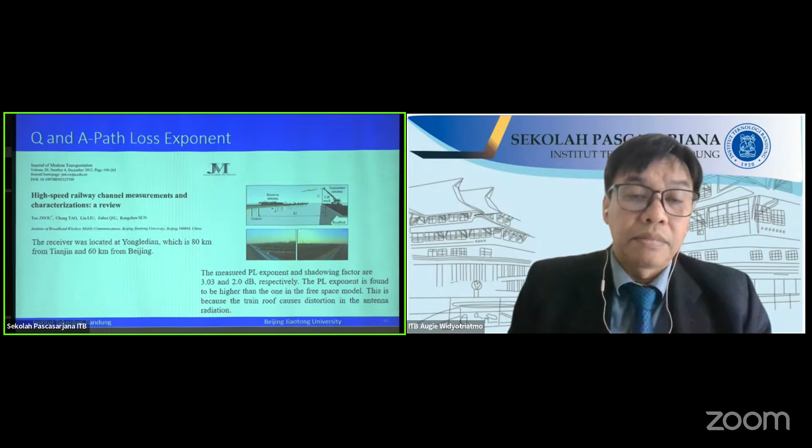Okay, firstly, the proposed path loss models can be utilized to accurately estimate the large-scale channel modeling in high-speed rail. So the link budget can be usable for the network designers in deploying base station infrastructures, or helping them do the frequency planning or small cell coverage.

So you can just put some parameters in the link budget, and if you click calculate, you will know whether the received signal level in the train is estimated as good or average, and then if it is good, you can just proceed with the field measurement.

Yeah. So, but I mean that you are still working with free space, right? Yes. But in reality, we see that Indonesia is very not disciplined, in the sense that there are growing trees and new buildings in places where it is not allowed, probably blocking the signaling path. So what do you suggest to the operators?

Okay. I suggest to the operators, instead of just using my link budget, you can validate the link budget by using extensive measurement, because for myself, I really want to continue my research by doing another propagation measurement in Indonesia, because there would be a change of path loss exponent dependent on the multi-path propagation.

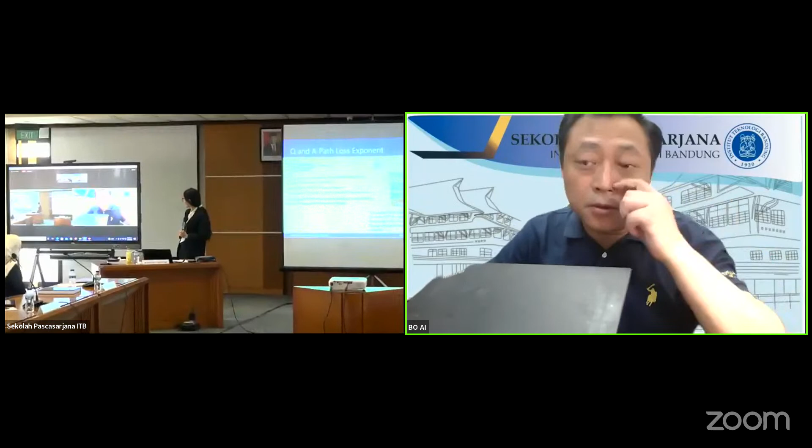Okay, I have just 2 questions. One is, what do you think about the model's performance compared with the existing path loss models? Okay. My model is extracted from the dynamic system of high-speed rail, while the other models are located in a steady environment where we have some kind of precise parameters. But I think for the running high-speed rail with a very dynamic velocity, either you have to choose machine learning path loss prediction, or you can do meta-heuristic optimization. So the difference is whether it is dynamic or steady.

Okay, the next question is, has your developed channel model been used in high-speed railway? For example, the Jakarta-Bandung high-speed rail. Excuse me, can you repeat your question? Has your developed channel model been used in high-speed rail, in the rail engineering application?

Yes, I hope that my model can help to accurately predict the large-scale channel fading in the Jakarta-Bandung high-speed rail, as the link budget is ready to be utilized. So perhaps by using the link budget, we can know the received signal level in the train to help the network designers in deploying the most optimal base station infrastructures, designing a small cell coverage area, or even the frequency planning if we are going to use a new frequency.

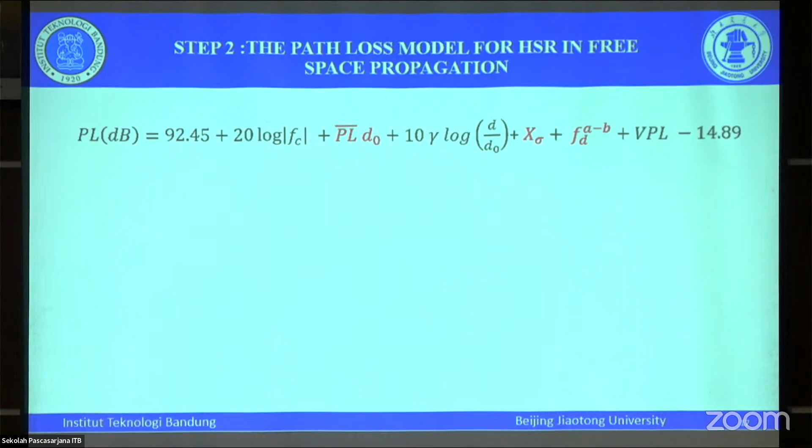Each parameter has a special contribution that must be included in the model. For example, the unknown parameter x1 must be included because, as I have mentioned, this is where the signal begins to attenuate.

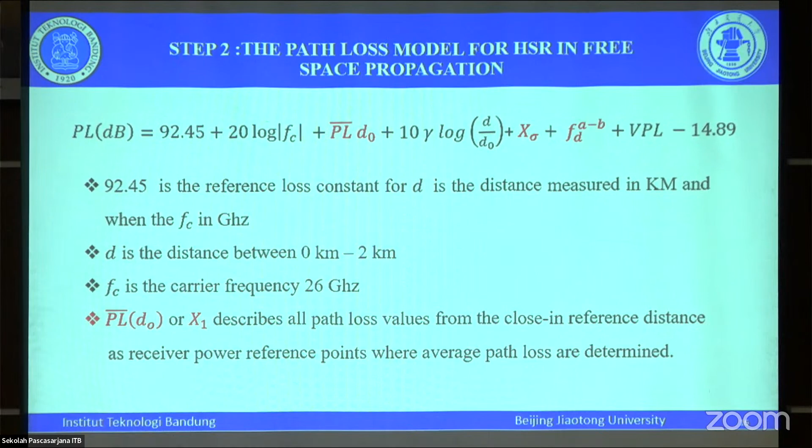I also justify this x sigma, because when there is a factor of weather or uneven contour, it can be some parameters in X sigma, and also the Doppler effect. After this we have complete parameters, and only these 3 we don't know the values.

Okay, now I would like to go to the second question. I think you found the models like you show in this PowerPoint. So what is the benefit of this model?

I hope these models can help accurately predict the large-scale channel estimation for our upcoming high-speed rail of Jakarta-Bandung. Because you can observe from the link budget the received signal level that is received in the high-speed rail, you can determine whether the signal level is quite strong, average, or just mediocre.

So whenever this is mediocre, you can just click some parameters. Maybe you have to add the antenna gain, maybe you just have to play with the Doppler, or increase the antenna height or something like that. You just can click the button in my link budget.

Okay, to answer that, let me show you from my link budget over here. Let's see the link budget here, but first I'm going to answer you about other scenarios, such as, for example, tunnels.

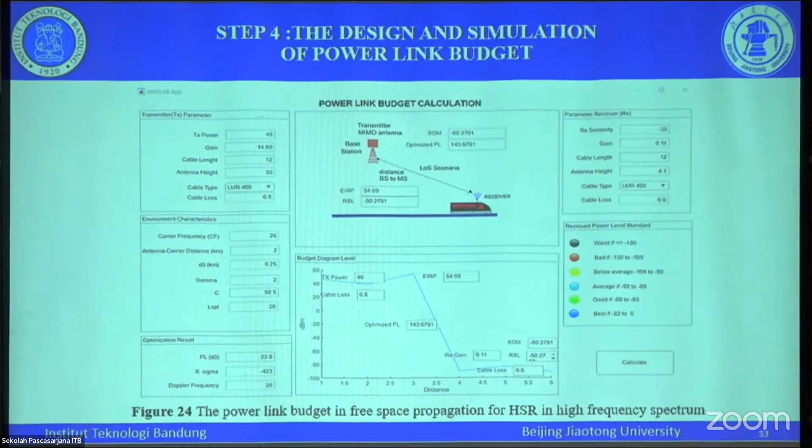And also for other scenarios, you can do field measurement again. Field measurement—not to forget to mention that you cannot collide with the frequency carrier.

But what I suggest—really proud if the link budget can be used in high-speed rail in Jakarta Bandung—because when the network designers want to do this and they want to know what is the receive signal level on the train, they can just put this parameter here.

If you want to have a receive signal level, they can increase the gain, or change the antenna height, or even change the frequency that they are working with. And by clicking like this, they can have an optimal receive signal level.

And also, whenever we must face a severe condition of weather or contouring, the sigma can be included. They can make a measurement of the path loss, the loss of signal because of the changes of weather, and it can be put in the X sigma, or even the Doppler frequency.

Maybe they can measure how much the Doppler frequency, and put it in here to make a simulation and get these values. After we calculate, they can have the receive signal level value before they conduct the real field measurement, and then compare it—the field result versus the simulated. So it can help them do some frequency path planning and additional small coverage areas.

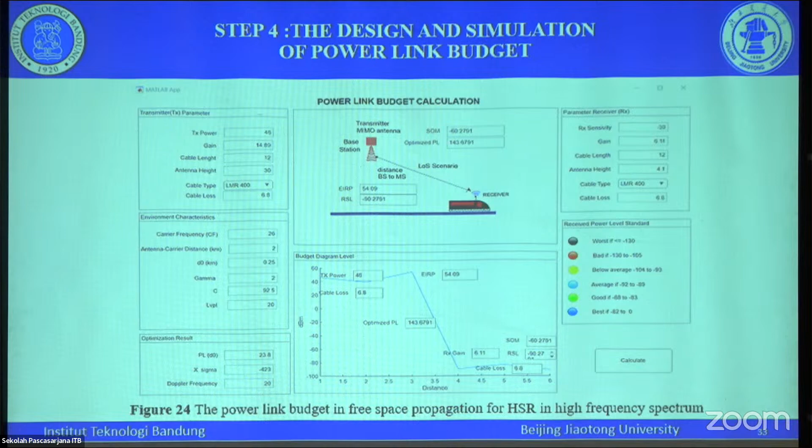Okay, I missed some information regarding the weather condition. How did you take this into account in your formula? Yes, the weather condition may cause signal distortion and frequency distortion also. That's why I'm putting it in the X sigma right here.

Because many disturbances will come along the way, not just weather—maybe uneven steep inclines may also cause disturbance. So that's why I summarized it into one parameter, what we call the X sigma right here.

Are you sure that it can be implemented, the formula in Indonesian high-speed railway? Yes, it can be, because once you have these complete parameters—I think it is the most complete—regarding only one base station that covers this high-speed rail, you can achieve the receive level.

You will know the receive signal level, so you can compare it. If it is simulated like this, you can ask what about in the field measurement? If it is as good as in the simulation, you can just proceed with the development.

Okay, then you will have very future works for the next Indonesian high-speed railway. Thank you. Thank you very much.